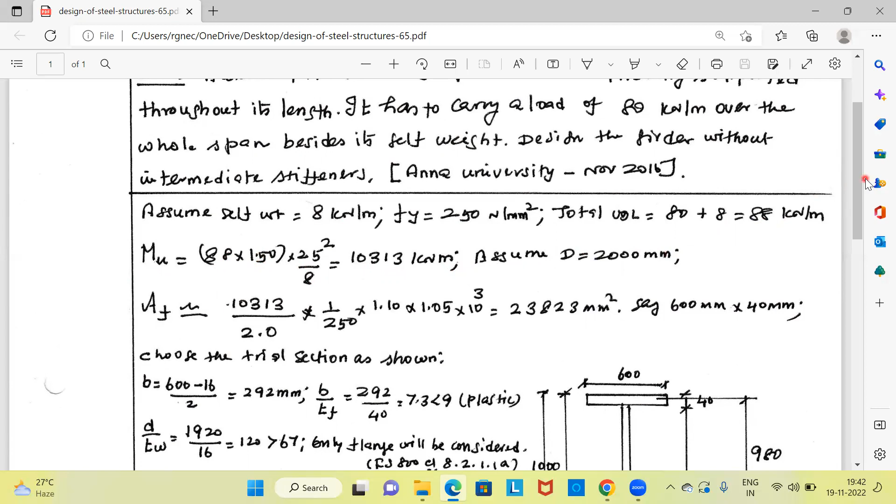Let us assume the total depth of the plate girder as 2000 millimeter. This has to be assumed in the range of span by 12 or something. This is just an approximation. Sometimes you can assume 1.5 meter, 2 meter, depending upon the span as well as the magnitude of the load. Here we have assumed the depth of the plate girder as 2000 millimeter.

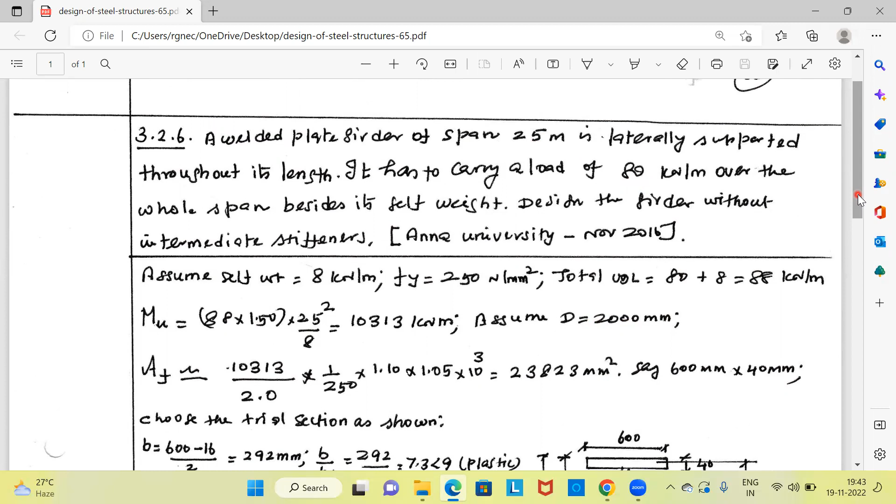Now we have to fix the size and dimensions of flange and web of the plate girder approximately. For this, we can use this approximate formula. Area of flange is equal to moment divided by total depth. To be precise, this should be the distance between flange to flange. Suppose 2000 is the total depth. Center to center distance between the two flanges will be somewhat less than 2000. Nevertheless, we will go with 2 meter here because this is an approximation.

So moment divided by this depth of the plate girder, which will act as a lever arm. Here again, center to center distance between the two flanges should be taken, but this being approximate, we are not bothered about the center to center distance of the flanges. Divided by Fy. Fy is 250. With the material factor of safety, it is 250 divided by 1.1. Therefore, that 1.1 will go to the numerator.

And then you increase this area by somewhere around 5%, just as an additional requirement. We are not sure whether this will cater to the actual requirement because this 2 meter is taken on the higher side. You increase this by another 5%, then you will get this. This is kilonewton meter and this is in meter. Therefore, we will get this in kilonewton. This kilonewton is converted into Newton by multiplying by 10 power 3. Then you have this 250 Newton per millimeter square. Therefore, you are getting this area in millimeter square.

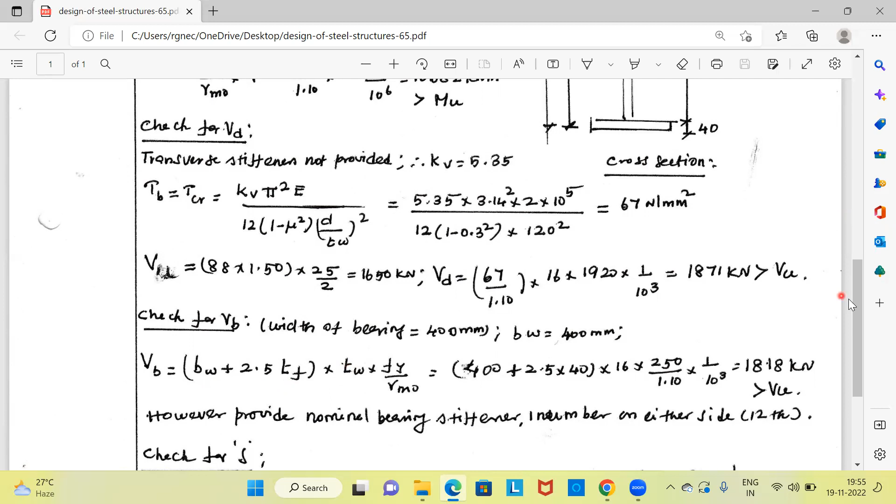It is coming to 1871 kilonewton, which is greater than VU. Now, width of the bearing, let us assume somewhere around 400 mm. Width of the bearing is equal to 400 mm. Now, the total bearing strength is equal to the contact area. Contact area is TW into BW plus 2.5 times TF. BW is the width of the bearing. TF is the thickness of the flange into 2.5. This is the contact area when it comes to mid depth with some 45-degree dispersion.

So BW is the length of the bearing which is in the perpendicular direction. 400 mm is the dimension of the bearing in the perpendicular direction. So formula is BW, that is 400 mm, the width of the bearing which is assumed, plus 2.5 times thickness of the flange, 2.5 times 40, into thickness of the web into 250 divided by material factor of safety. This will give in Newton. Divide this by 10 power 3. You will get the bearing strength in kilonewton. That is also greater than the shear force VU. Therefore, it is safe against bearing also.

Here we have designed the section without stiffeners. However, we have to provide some nominal stiffeners at the support. That is mandatory. Only for the intermediate stiffeners you have the option to design with or without stiffeners, depending upon the thickness of the web, but at the support location, you have to provide the bearing stiffener. Hence, provide nominal bearing stiffener, one number on either side, 12 mm thick stiffener.

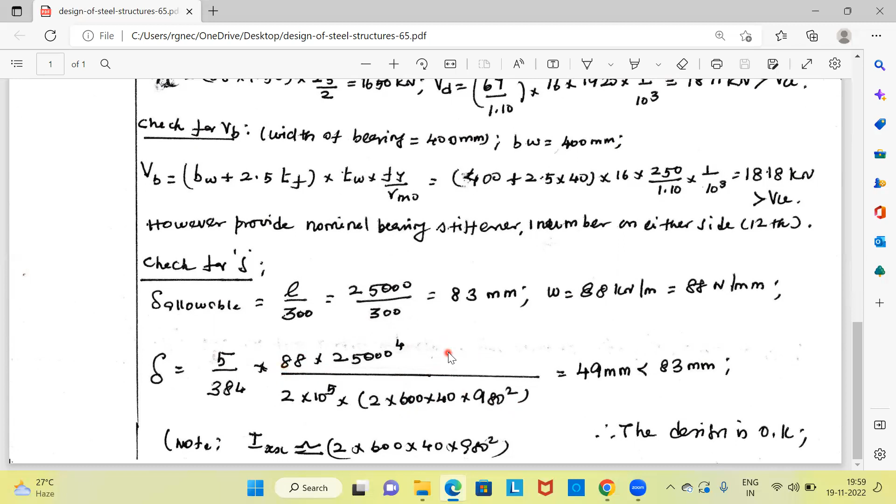5 by 384, WL power 4. This is in millimeter, no problem, 25,000. 2 into 10 power 5 Newton per millimeter square, no problem. This is in millimeter power 4, no problem. This should be 88 into 10 power 3. Here 10 power 3 is missing. Please take note of this. You should have here 88 into 10 power 3 into 25,000 power 4. In the numerator, 10 power 3 is missing. However, the value of deflection is 48.9 mm. It is less than 83 mm.

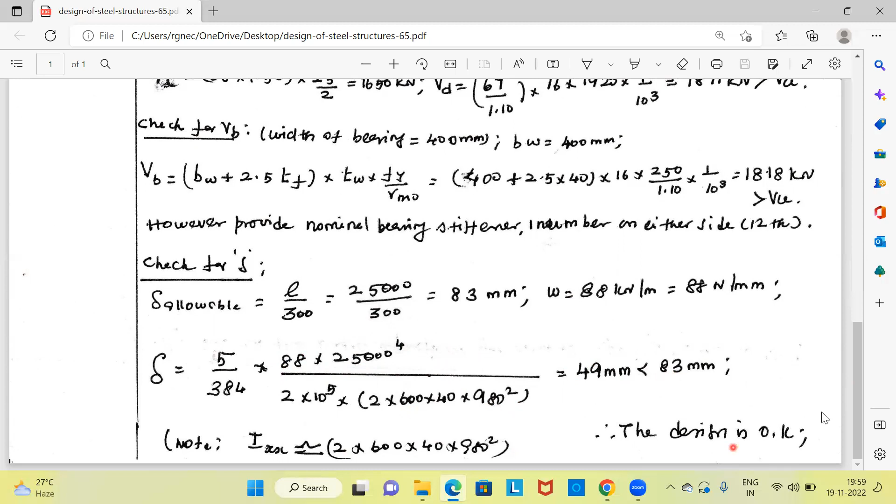With this, the design is over. We have assumed the cross section and then we have checked it for bending strength, shear strength, bearing strength, and deflection also. With this, the design of plate girder is complete.